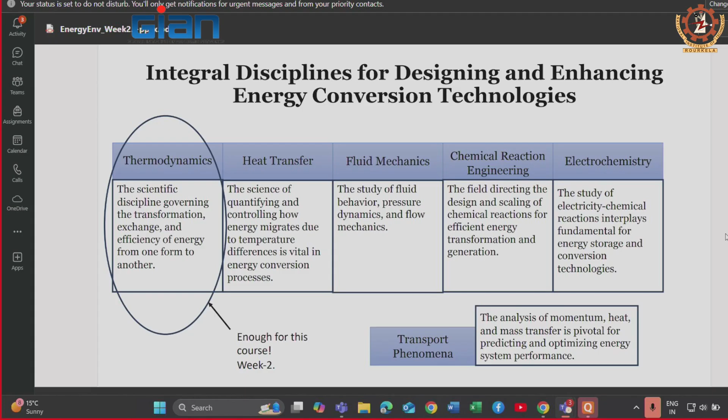And electrochemistry, the study of electricity and chemical reaction interplay, is fundamental for energy storage and conversion technologies.

The analysis of momentum, heat and mass transfer will be pivotal for predicting and optimizing energy system performance, which is called transport phenomena.

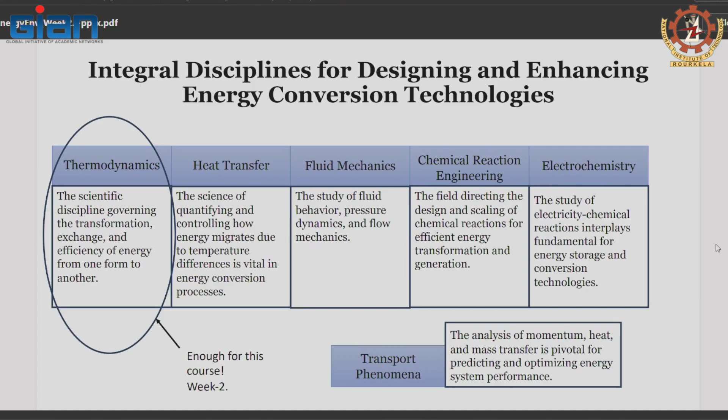But thermodynamics will play a major role in these energy conversion technologies. Here we see another importance of thermodynamics in energy and environment: system efficiency, sustainability and environmental impact.

Using thermodynamics, one can define and measure the efficiency of various systems. An example is calculating the efficiency of a heat engine, again for maintaining sustainability of the environment and understanding its impact.

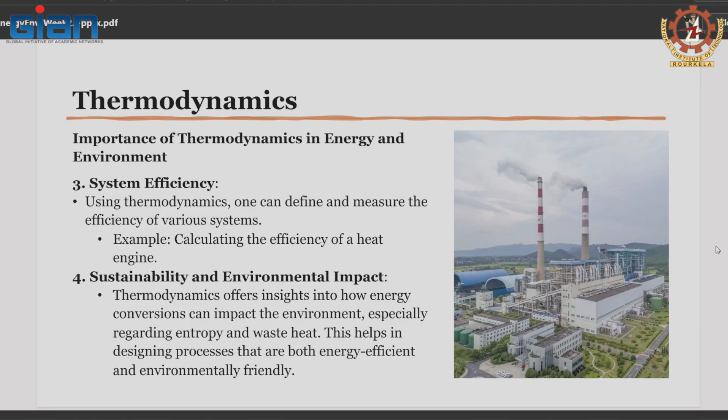Thermodynamics offers insights into how energy conversion can impact the environment, especially regarding entropy and waste heat. This helps in designing processes which are both energy efficient and environmentally friendly.

Now looking at thermodynamics in energy conversion systems: work done by the pump is supplied to the boiler where heat is supplied, and from the boiler steam is generated. Through the turbine we get work output, which is then converted to power, and the vapor can be condensed further and heat will be released.

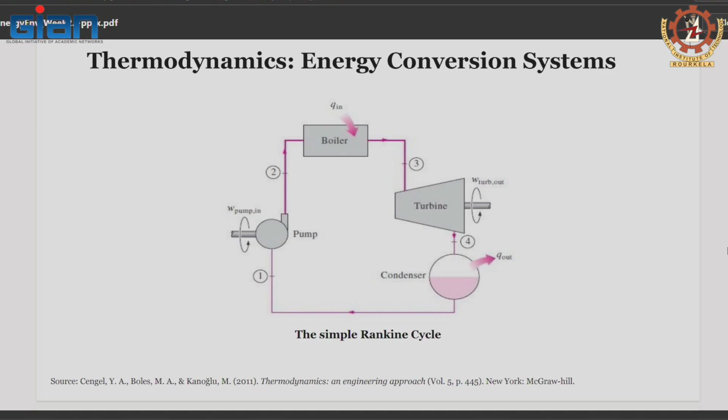So this is the simple Rankine cycle, a thermodynamics energy conversion system.

Here is a biogas fueled solid oxide fuel cell, micro CHP combined heat and power system, where energy is converted. Biogas, produced from biomass, is supplied to the reformer, and from there we finally get steam, and also the net electric power along with internal power consumption, which can be sufficient.

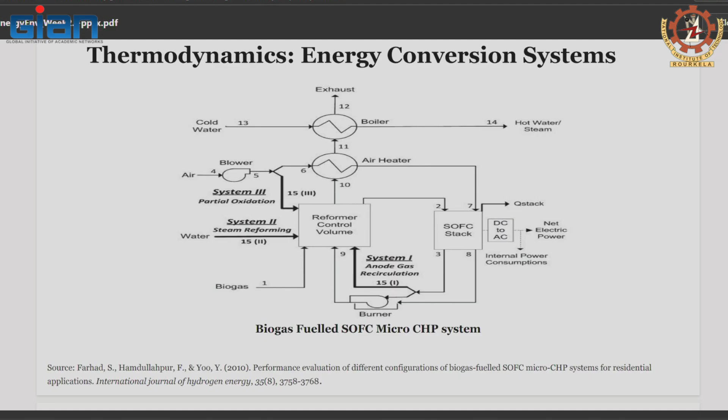From this net electric power we can get the net internal power consumption as well as some excess power. This is the thermodynamics also shown from the simplified process flow sheet.

It is for polygeneration systems, where we are getting carbon dioxide for storage, carbon dioxide emitted, sulfur emitted, and syngas is produced from this carbon dioxide, sulfur and water we are getting, and there also we are getting power.

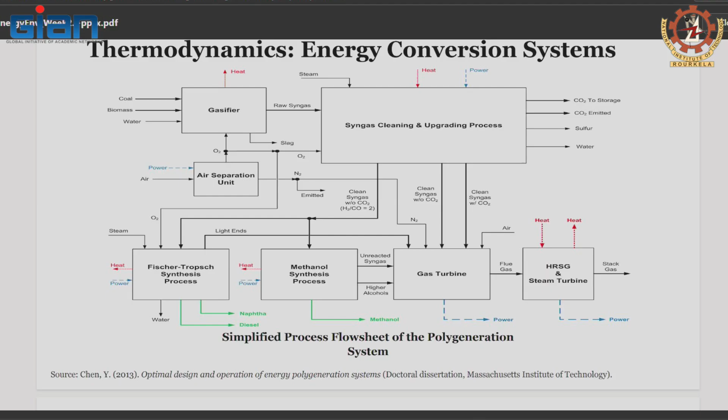The fundamental laws of thermodynamics are applied, starting with the first law of thermodynamics, where the conservation of energy principle exists, one of the most fundamental laws of nature. Energy can change forms during interaction, but total energy remains constant—it cannot be created or destroyed.

So the first law of thermodynamics again expresses the conservation of energy principle, asserting that energy is a thermodynamic property. Then there is conservation law for mass, that is, mass cannot be created or destroyed.

In a closed system, there is no mass transfer and mass remains constant. In open systems, mass can enter or leave.

Energy forms—kinetic, potential, or internal energy—are different types of energy, where the first law describes conversion between these forms, and energy transported as heat and work.

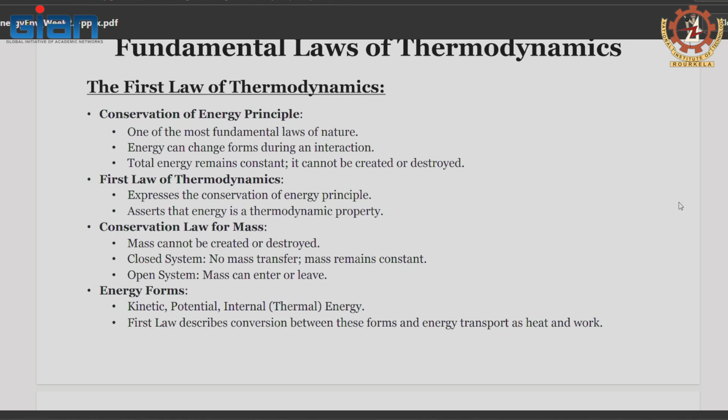So the second law of thermodynamics is also applicable here. In thermodynamic processes, processes have inherent restrictions—for example, heat flows from hot to cold, not the vice versa.

The second law of thermodynamics introduces entropy, which can be created but not destroyed, and describes the change of energy entropy due to transport and creation.

It also deals with entropy creation, which is irreversible, leading to work loss. Implications of the second law: efficiency of heat engines is restricted to values below 100%, where heat cannot be fully converted into work, and also the quality and quantity of energy is determined, since energy has both quality and quantity.

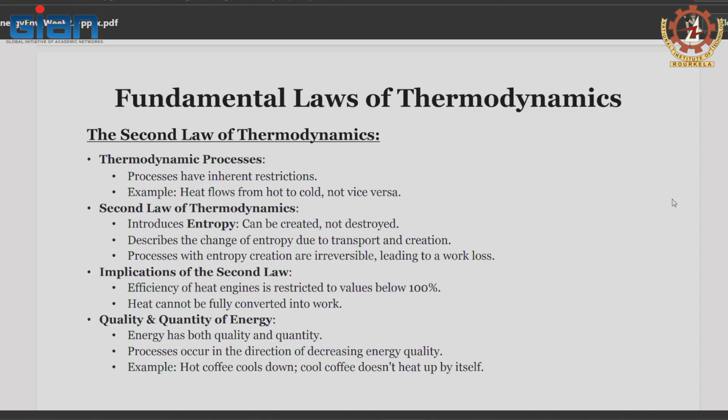Processes occur in the direction of decreasing energy quality. For example, hot coffee cools down, but cool coffee does not heat up by itself.

Modeling and analysis of thermodynamic systems involves problem statements, then step 2 is the schematic, and step 3 is the assumptions and approximations for the modeling. Then come the governing equations, the properties, solution procedure, reasoning, verification, and discussions.

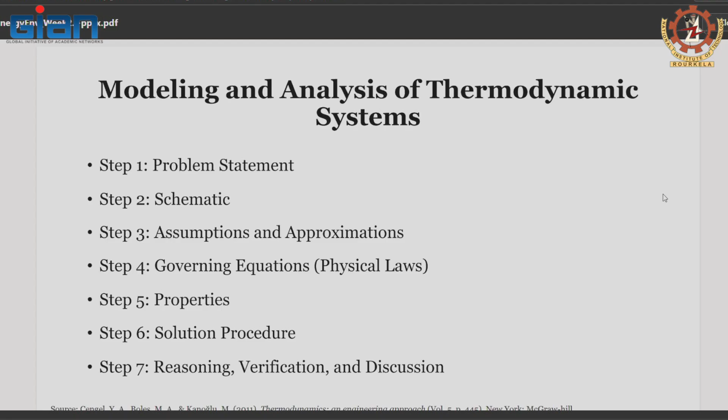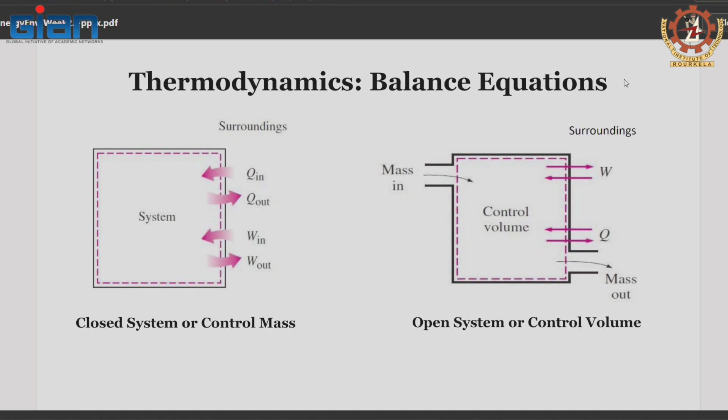This occurs in closed systems or control mass. In open systems or control volume, mass enters the control volume, work is transferred across the boundary both from surrounding to system and system to surrounding. Similarly, energy flows across the boundary in both directions, and some mass is collected out from the system - this is the open system or control volume.

For thermodynamic balance equations in closed systems, mass input equals mass output, meaning total mass remains constant.

For energy balance, energy in minus energy out equals the total energy. So the net change, net energy transferred by heat and work, equals the change in total energy, or net energy internals - that is kinetic energy, internal energy, and potential energy.

For exergy balance, net exergy transferred by heat and work - that is x in minus x out minus x destroyed, how much energy or heat and work gets destroyed - equals delta x of the system, that is the change in exergy.

For thermodynamic balance equations in open systems, mass in minus mass out is the net mass in the system, and energy in minus energy out is the net energy in the system. Energy transfers occur by heat, work and mass, and the net energy is the change in internal, kinetic, and potential energy - all forms of energy existing in the system.

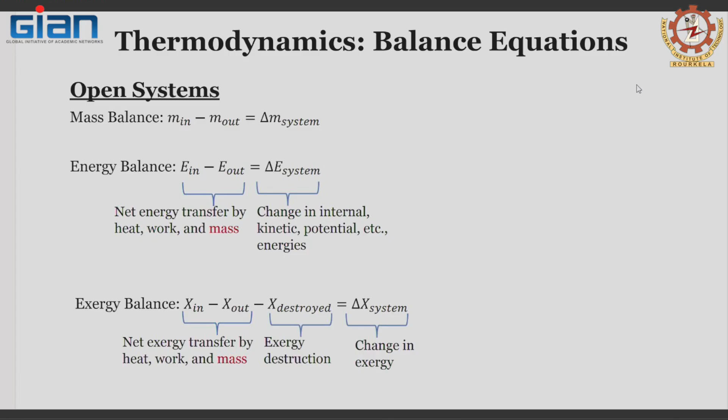See example 1 on the balance equations for this thermodynamics concept. A textile plant requires 4 kg per second of saturated steam at 2 megapascal, extracted from the turbine of a cogeneration plant. Steam enters the turbine at 8 megapascal and 500 degrees centigrade at a rate of 11 kg per second and leaves at 20 kilopascal.

The extracted steam leaves the process heater as a saturated liquid and mixes with the feed water at constant pressure. The mixture is pumped to the boiler pressure, assuming an isentropic efficiency of 88% for both the turbine and the pumps. Determine the rate of process heat supply and the net power output.

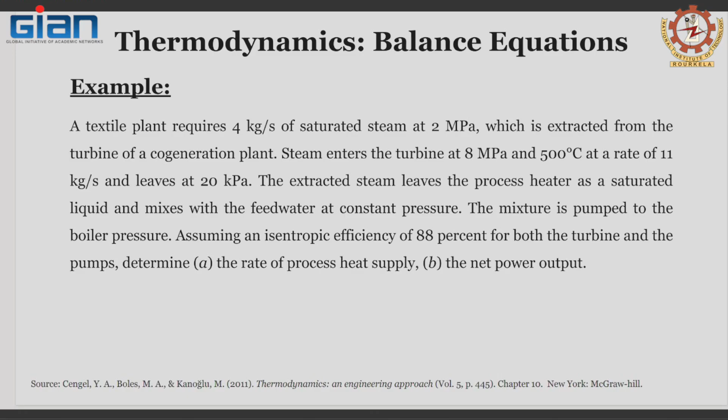The solution: the problem states a combined heat and power facility designed to produce electricity and process heat. Some steam is taken from the turbine at high pressure for heating, and the facility's heat output rate, total net power generated, and plant efficiency need to be calculated.

Assumptions: steady operating conditions exist, and kinetic and potential energy changes are negligible.

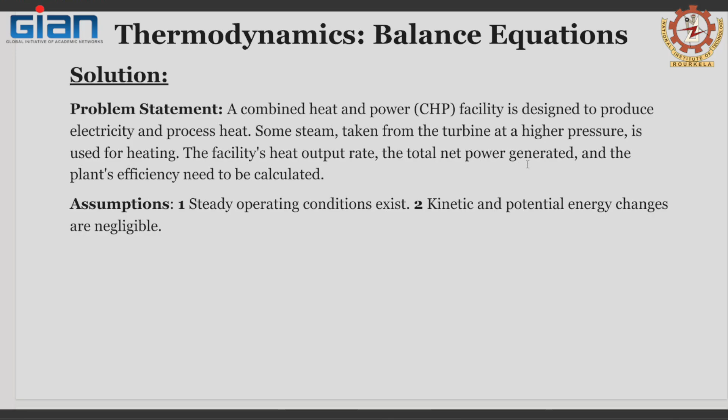So, thermodynamic balance equations solutions, that is rate of process heat supply, that is Q process equals mass into net enthalpy, that is m dot 7 into H7 minus H3, where m dot 7 is m dot 3, that is from the mass balance for the process heater. M dot shows the mass flow rate, and H7 and H3, the difference is the enthalpy values at stream 7 and stream 3, that is the thermodynamic property.

Which use steam tables to define the enthalpy values with the two independent properties, and for different substances one needs to employ various property methods to define their thermodynamic properties. Several commercial tools are also available. By choosing the appropriate property method, one can estimate thermodynamic properties such as enthalpy, entropy and specific volume.

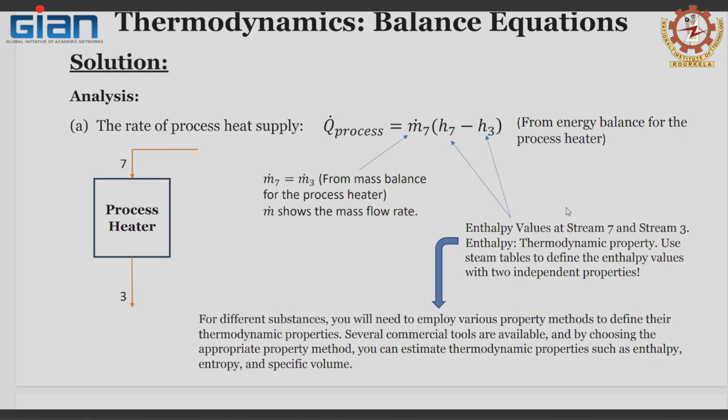Now, using turbine isentropic efficiency, one can calculate the enthalpy at stream 7. So, it is the efficiency for the turbine, H6 minus H7 divided by H6 minus H7s. So, thus at pressure 6, that is 8 megapascal, temperature for the 6th stream is 500 degree centigrade. So, from this, H6, that is enthalpy, can be obtained from the steam table.

So, H6 is 3399.5 kilojoule per kg, and S6 is 6.7266 kilojoule per kg degree Kelvin. So, for the 7th stream, pressure is 2 megapascal, and S7 equal to S6, which from that again gives enthalpy for stream 7, that is 3000.4 kilojoule per kg.

Now, again for enthalpy, H7 is H6 minus efficiency into H6 minus H7s, means side stream of the 7th stream, H7s. So, thus H7 is calculated to be 3048.3 kilojoule per kg. Now, next step, one should find H3 using steam tables.

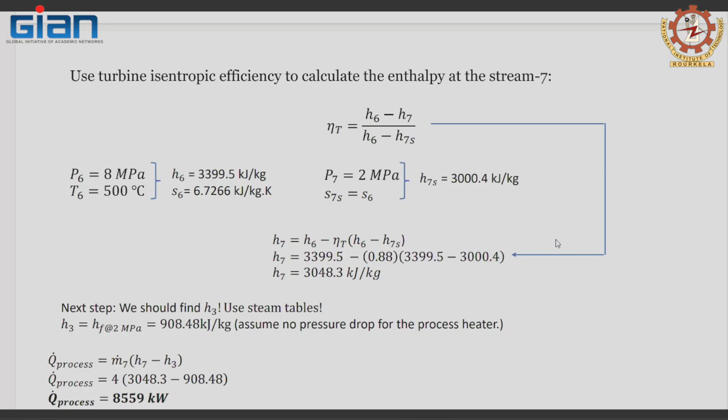Now, the power output, W dot net, which is turbine work done, that is work output from the turbine minus the work input to the pump P. So, thus work out from the turbine is m dot 7 into H6 minus H7 plus m dot 8 into H6 minus H8.

So, work done by the pump, work input to the pump, is m dot 1 into WP1 dot, means at the inlet what is the work done, work input to the pump, plus m dot 4 work done at the P2 inlet point. So, thus it is...

WP1 at the inlet is V1 into P2 minus P1 by efficiency of the pump. And WP2 at the inlet is V4 into P5 minus P4 by efficiency of the pump. So, thus H1, which is the enthalpy of the feed at 20 kilopascal, that is 251.42 kilojoule per kg, and V1, that is volume per unit mass, equal to Vf at 20 kilopascal pressure, is 0.001017 meter cube per kg.

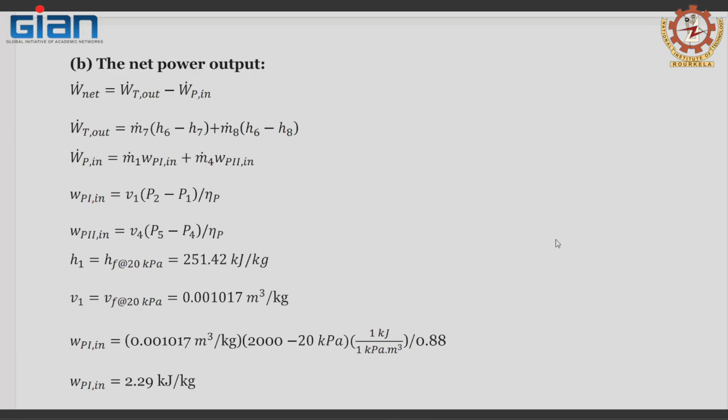So, work input at P1 is calculated to be 2.29 kilojoule per kg. H2, which is H1 plus work done at P1 point for the input side. So, H2 is found to be calculated as 253.71 kilojoule per kg.

Energy balance for the mixing chamber is calculated as M3 dot into H3 plus M2 dot into H2, which equals M4 dot into H4, that is H4 is 491.81 kilojoule per kg. Now, V for specific volume for stream 4 will be Vf at Hf equal to 491.81 kilojoule per kg, which will be 0.001058 meter cube per kg. Thus, work input at P2 for the inlet side is 7.21 kilojoule per kg.

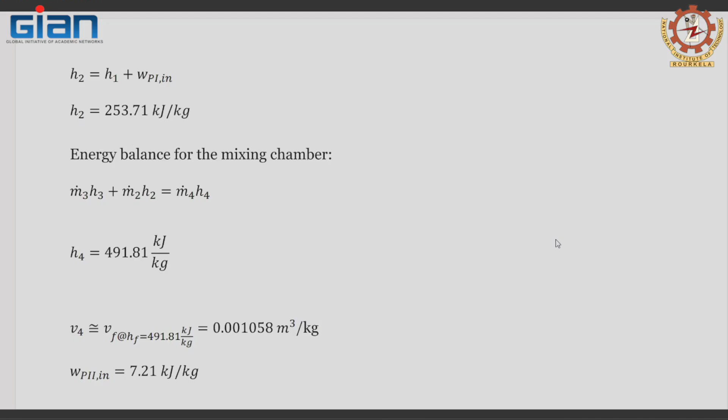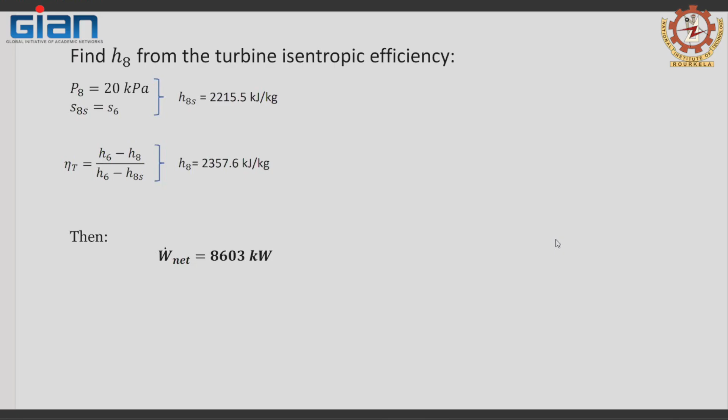So, finding H8 from the turbine isentropic efficiency, that is P8 is 20 kilopascal, S8s is S6, which gives H8s, and that is 2215.5 kilojoule per kg, and turbine efficiency is H6 minus H8 divided by H6 minus H8s, thus H8 is 2357.6 kilojoule per kg. So, thus net work done, W net dot, is 8603 kilowatt.

Now, thermodynamic analysis with the innovative technology integration is the problem definition. When it comes to creating fuels and chemicals through gasification, that is coal gasification or biomass, a major challenge is the resulting gas low hydrogen to carbon monoxide molar ratio, and this ratio often does not meet the specific requirements for Fischer-Tropsch or DME synthesis, even though it can vary based on the type of feed used.

One way to address this imbalance is using the water gas shift reactor to upgrade the gas. However, while this can be effective, it reduces carbon efficiency across the entire plant, which increases carbon dioxide emissions and raises the capital and processing expenses.

Alternative methods like steam methane reforming provide hydrogen rich syngas, but they come with their own challenges. For example, steam methane reforming is highly endothermic and can lead to carbon dioxide emissions due to the combustion of natural gas for heat.

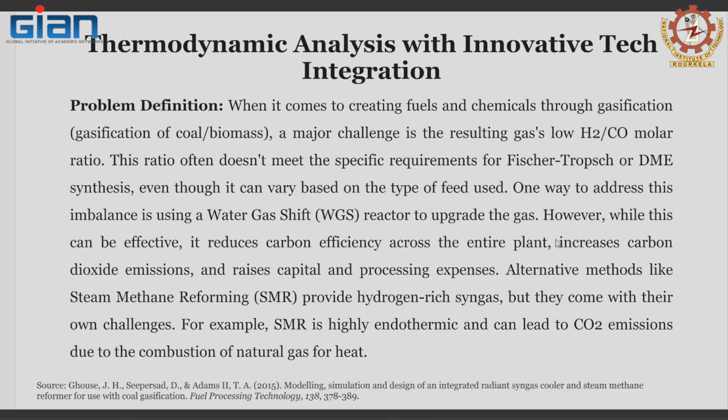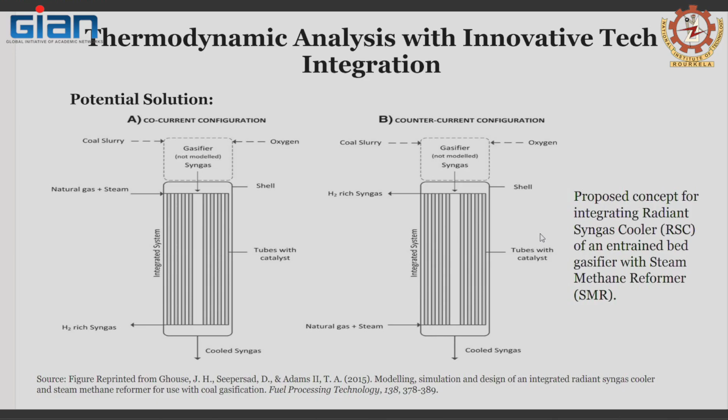So this proposed concept for integrating a radiant syngas cooler of an entrained bed gasifier with a steam methane reformer is shown here.

So the output will be natural gas and syngas. So that is a coal gasifier.

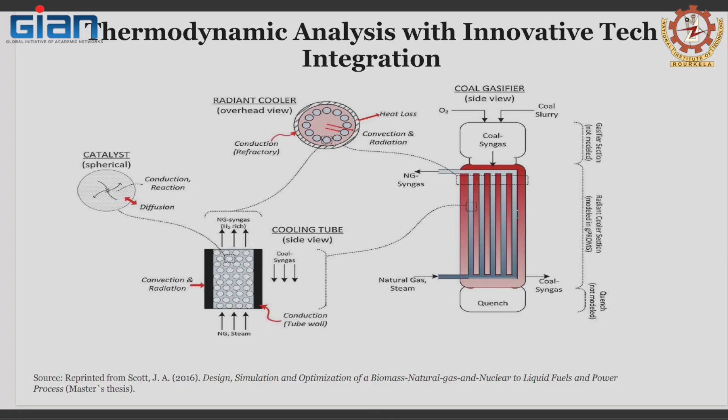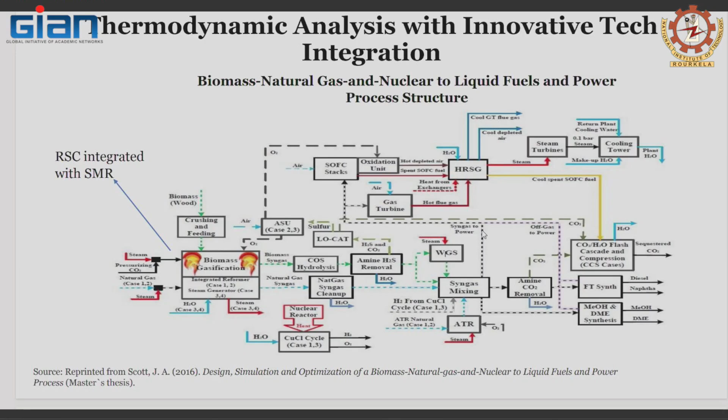Thermodynamic analysis with innovative technology integration, that is biomass, natural gas and nuclear to liquid fuels and power process structures. So here biomass, natural gas, and nuclear energy are combined, and finally we obtain the hot or syngas and the cool, pure clean syngas.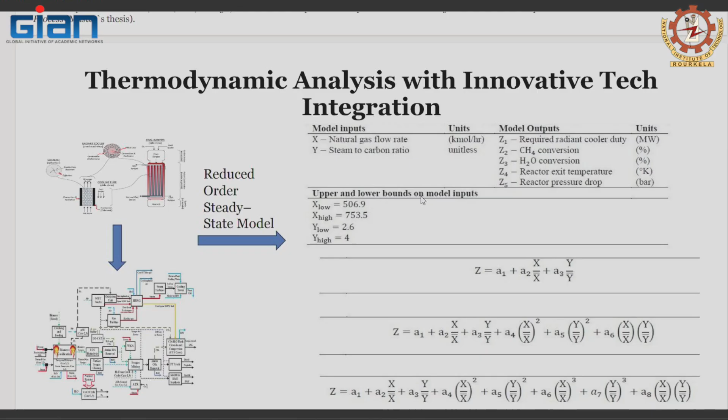Again, integrating the reduced order steady state model. So with these models, all the technologies can be integrated, and from this one can have an idea how much net energy will be generated.

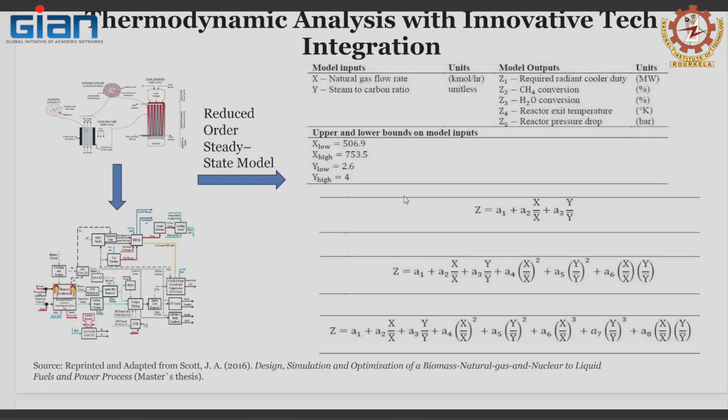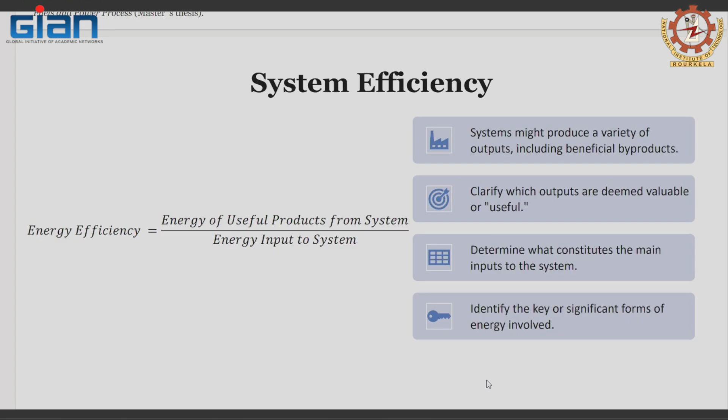Then finally, system efficiency can be calculated, that is energy efficiency, which is the energy of the useful products from the systems divided by energy input to the systems. The systems might produce a variety of outputs, including beneficial byproducts. We clarify which outputs are deemed valuable or useful, then determine what constitutes the main inputs to the systems, and identify the key or significant forms of energy involved.

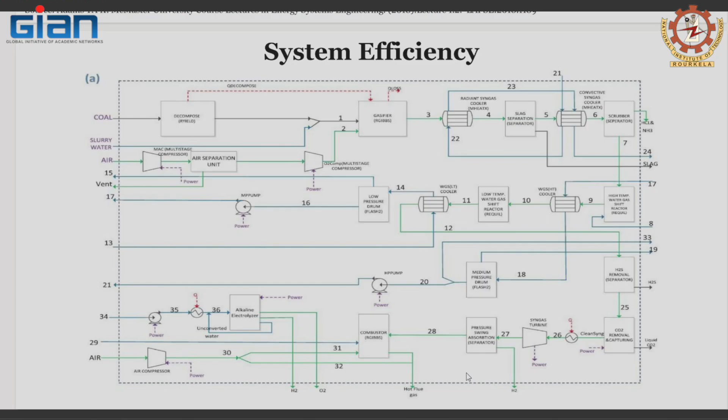This is also a flow sheet for the system efficiency. Energy efficiency of the system we can calculate using hydrogen mass flow rate into low heating value for the hydrogen, divided by coal mass flow rate into low heating value of the coal. Exergy efficiency we can calculate similarly, for the system it is hydrogen flow rate, mass flow rate into exergy of the hydrogen.

Divided by mass flow rate of the coal into exergy of the coal. So exergy of the coal means specific exergy of the coal in kilojoule per kg, exergy of the hydrogen is specific exergy of hydrogen in kilojoule per kg, lower heating value is in kilojoule per kg, and mass flow rate of coal into the gasifier is the feed for the gasifier in kg per hour.

And MH2 dot is the hydrogen production rate in kg per hour. That's all. This material was given by the foreign expert, but as he was ill, he could not deliver it. So I displayed all the PPTs, and as it is his material, I just overall read it, and wherever possible I told something. Otherwise this simulation part and the complicated flow sheets, as I am not aware of this, I could not explain.

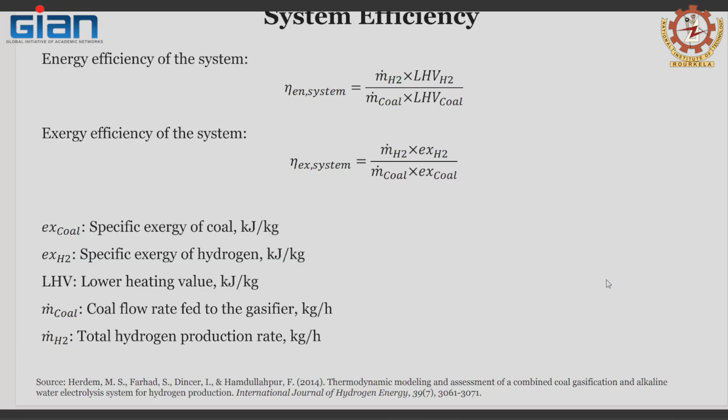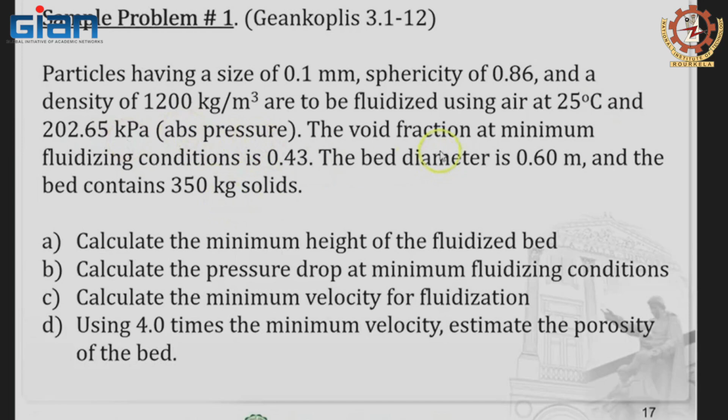Thank you. Problem 1: particles having a size of 0.1 millimeter, sphericity of 0.86, and density of 1200 kg per meter cube are to be fluidized using air at 25 degree centigrade and 202.65 kilopascal absolute pressure. The void fraction at minimum fluidizing conditions is 0.43.

The bed diameter is 0.6 meter and the bed contains 350 kg of solids. Calculate the minimum height of the fluidized bed. Second, calculate the pressure drop at minimum fluidizing conditions. Third, calculate the minimum velocity for fluidization. Fourth, using 4 times the minimum velocity, estimate the porosity of the bed.

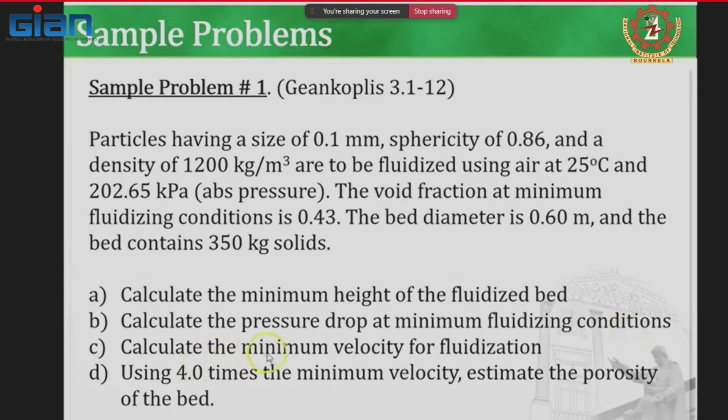So here particle diameter is 0.1 into 10 to the power minus 3 meter. Density is 1200 kg per meter cube, sphericity 0.86, voidage 0.43, diameter of the bed 0.6 meter - this data is given. Air is at 25 degree centigrade, pressure 202.65 kilopascal, density 2.372 kg per meter cube, and viscosity 1.845 into 10 to the power minus 5 Pascal second.

So we need to calculate the length or height of the fluidized bed, and the pressure drop, and then the velocity for fluidization, and voidage, and the velocity when it is 4 times the fluidization velocity.

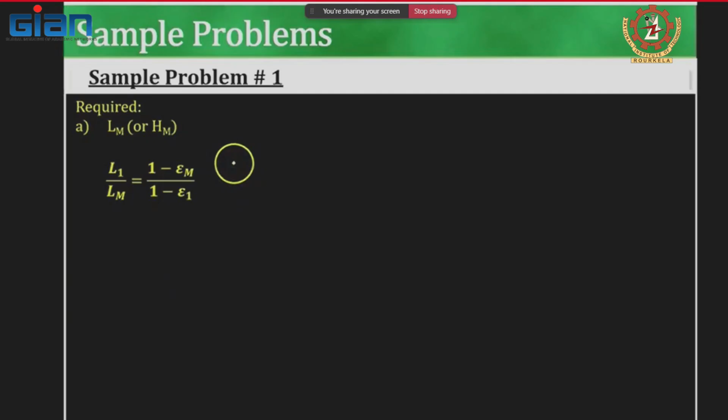Here we can see the column given, where L1 by Lm is equal to 1 minus voidage of the bed, divided by 1 minus epsilon 1. Epsilon 1 is 0, because here we have not yet started supplying the fluid. So the volume for the solid will be ms by density.

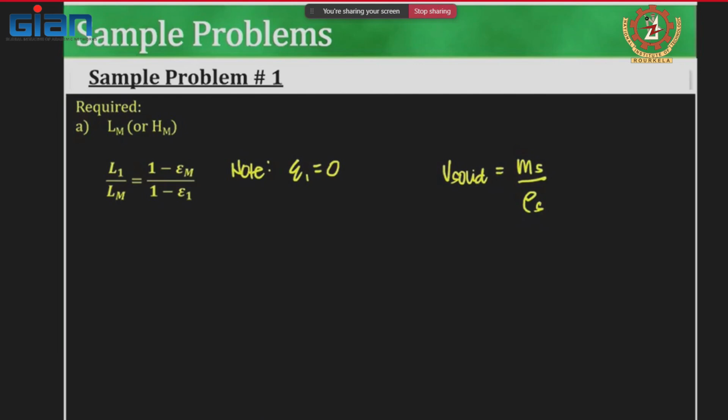Mass by density, so volume for the solid will be 350 divided by 1200 kg per meter cube, mass by density. So this is 0.2917 meter cube.

Now volume of the bed, which will be cross sectional area into length. So volume is 0.2917, which is pi by 4 d square, that is 0.6 square, into L1. From this we can get L1, which is 1.0317 meter.

Now after knowing the length, here we can calculate Lm from this expression, where voidage for the bed is given as 0.43. So 1 minus epsilon m is 1 minus 0.43, and epsilon 1 is 0, so the denominator is 1. From this, Lm comes to 1.81 meter. So the first part, calculating the minimum height of the bed, is over.

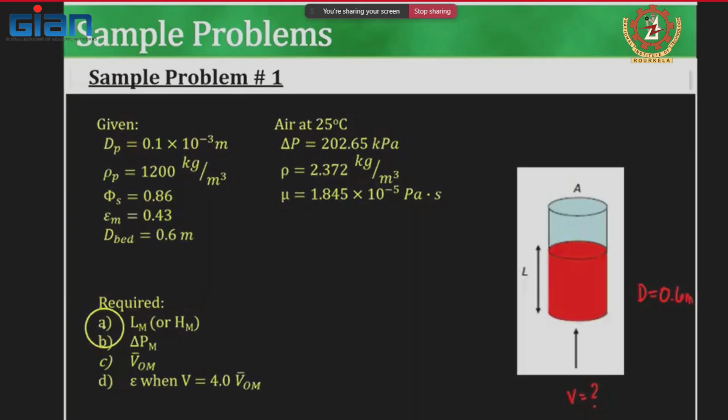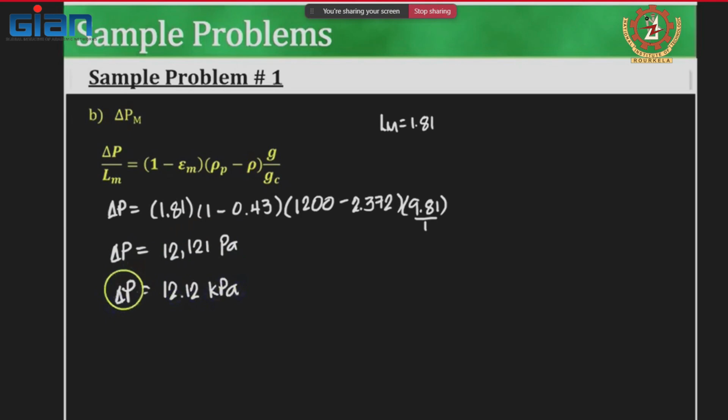Now the second part: pressure drop divided by length of the bed equals 1 minus epsilon m into density of the particle minus density of the fluid, into G by Gc. So here we can calculate delta P: 1.81 into 1 minus 0.43 into 1200 minus 2.372, into G which is 9.81, and Gc is 1. Multiplying by Lm, we finally get delta P as 12,121 Pascal or 12.12 kilopascal.

Now the third part, where the minimum fluidization velocity we can calculate using the equations given in the Kunii-Levenspiel book. So we substitute all the data we have: 150 into viscosity into velocity for minimum fluidization, which we will calculate.

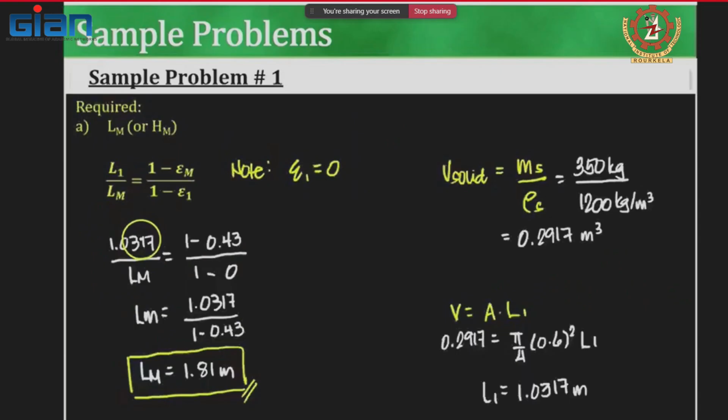Now the sphericity and the bed voidage are given. Substituting all the data, on the first term it is denominator phi s 0.86 and dp 0.1 into 10 to the power minus 3 square, dp square, and here epsilon m is 0.43. So the first term is over, only V Om, minimum fluidization velocity data, is unknown which we will calculate. The second term also has V Om, minimum fluidization velocity, as unknown data.

So substituting all other data, we can get the minimum fluidization velocity, with g 9.81, rho p 1200, and rho 2.372, that is density of the gas. Thus minimum fluidization velocity is calculated as 4.375 into 10 to the power minus 3 meter per second.

Now the second and third bit are over, so we can go to the fourth bit. When velocity is 4 times the minimum fluidization velocity, we substitute into the expression for minimum fluidization velocity from the Kunii-Levenspiel equation. In the third bit we calculated the minimum fluidization velocity as 4.375 into 10 to the power minus 3 meter per second. For this step we take this velocity as 4 times the minimum fluidization velocity, which comes to 0.0175 meter per second.

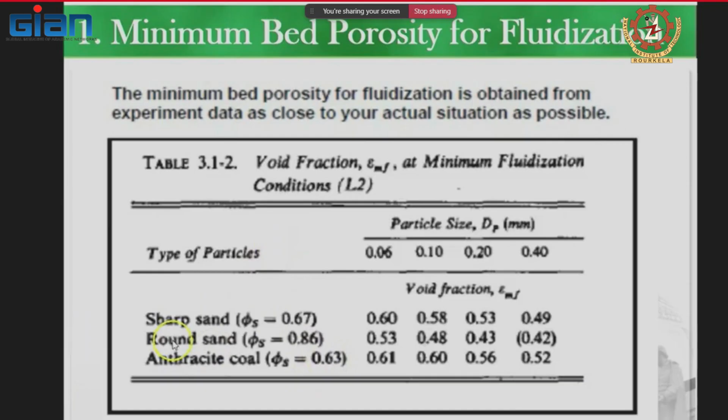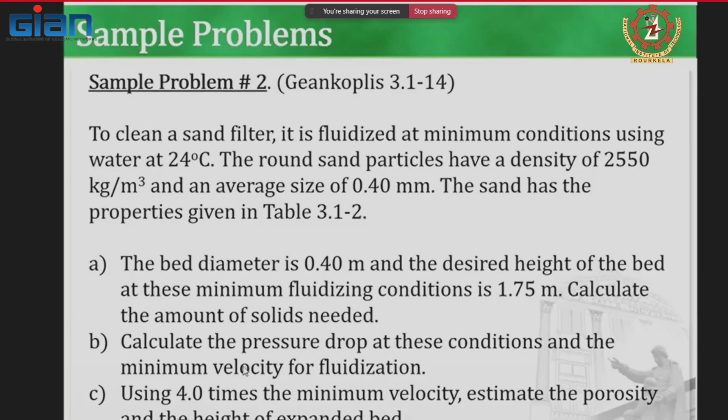So another problem, the second problem: to clean a sand filter, it is fluidized at minimum conditions using water at 24 degree centigrade. The round sand particles have a density of 2550 kg per meter cube and an average size of 0.4 millimeter. The sand has the properties given in this table. Bed diameter is 0.4 meter and the desired height of the bed at minimum fluidization condition is 1.75 meter. Calculate the amount of solid needed. Second bit: calculate the pressure drop at these conditions and the minimum fluidization velocity, and using 4 times the minimum fluidization velocity, estimate the porosity and the height of the expanded bed.

So the data is taken from the table, and round sand is there. For this, diameter is 0.4 into 10 to the power minus 3, bed void is 0.42, diameter of the bed is 0.4, length of the bed is 1.75. Water is at 24 degree centigrade, for which viscosity and density are as follows: 0.9142 into 10 to the power minus 3 kg per meter second, density 997.31 kg per meter cube. We need to calculate MS, mass of the solid, which is volume into the density of the particles into the bed, meaning 1 minus bed voidage.

So we can get the mass of the solid, because area is pi by 4 d square, the cross sectional area of the bed. So it is pi by 4 into 0.4 squared, and here length of the bed is 1.75, with 1 minus 0.42 bed voidage, and density 2550. Thus this comes to 325.25 kg of mass solid. That is the first bit over.

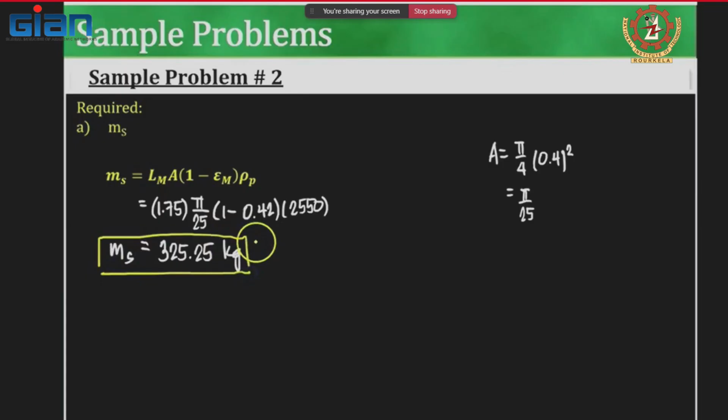Second is pressure drop and the minimum fluidization velocity. So again, delta p by Lm is 1 minus epsilon m into rho p minus rho into g by gc.

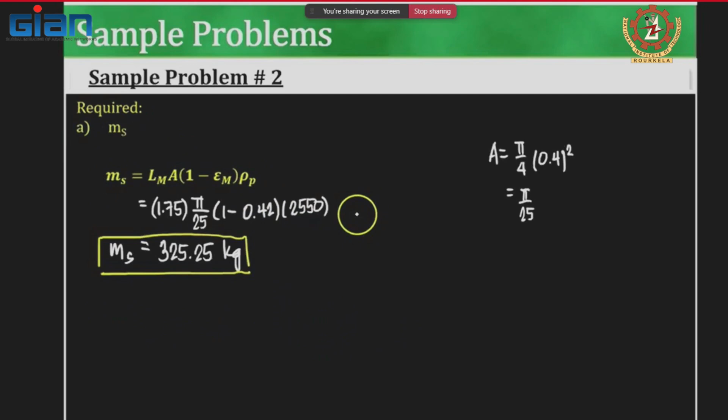So the pressure drop can be calculated by substituting bed voidage and densities, which are known. The length of the bed is also known. So substituting all the data, we can calculate the pressure drop, which comes out to be 15,460.37 Pascal, or 15.5 kilopascal.

Now the minimum fluidization velocity can be calculated using the equation given in the Kunii-Levenspiel book. Using the data, that is porosity, viscosity, and sphericity, since round spherical particles are taken, sphericity will be 1, and all other data like particle size and densities are known. So substituting all the data, we can calculate. But from the data table, although it is nearly round, the sphericity given is 0.86.

So we are taking 0.86 sphericity and calculating the velocity. On the right side, we have 9.81 into rho p, 2550 minus rho, 997.31. So the minimum fluidization velocity comes out to be 1.658 into 10 to the power minus 3 meter per second.

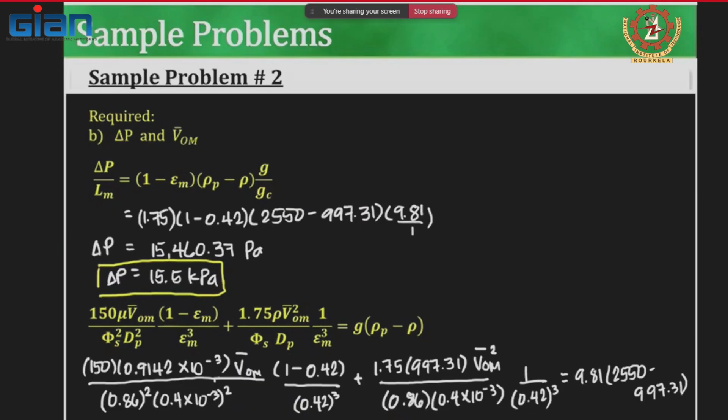Now for the third part, the porosity and length of the bed are required when the velocity is 4 times the minimum fluidization velocity. Using the same equation for minimum fluidization velocity, we substitute velocity with 4 times the minimum fluidization velocity, from which we can calculate the porosity, because with increased velocity, porosity increases and changes. Substituting V as 4 times the minimum fluidization velocity, it comes out to be 6.632 into 10 to the power minus 3 meter per second.

Now substituting all this data into the equation, we can get the porosity, which comes out to be 0.6. So we see that the porosity has changed, it has increased.

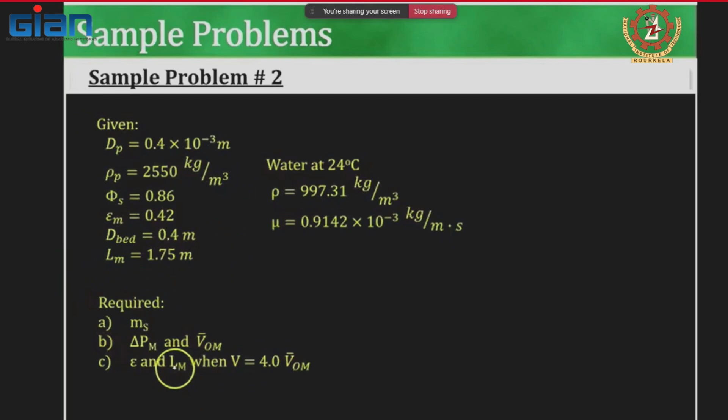Now we can calculate the length of the bed using this expression: L1 by L2 equals 1 minus epsilon 2 by 1 minus epsilon 1, since porosity will be different at different heights. If we take L1 as Lm equal to 1.75 meter, which is given, and epsilon m equal to epsilon 1 equal to 0.42, corresponding to the initial porosity of 0.42, the height of the bed was 1.75 meter. Now the porosity changes to 0.6, and correspondingly, the length of the bed can be calculated using this equation, which comes out to be 2.5375 meter. So the length of the bed corresponding to porosity of 0.6 is 2.5375 meter.

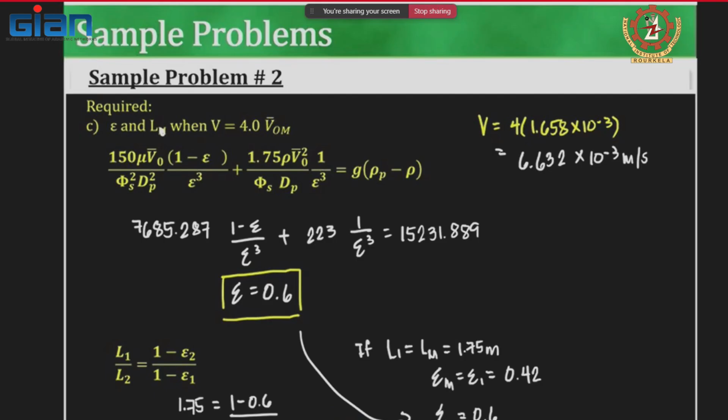Now coming to the fourth part - sorry, with this the third part is over. So now we can solve another problem.

A powder of mean size 60 micrometer and particle density 1800 kg per meter cube is fluidized by air of density 1.2 kg per meter cube and viscosity 1.84 into 10 to the power minus 5 Pascal second in a circular vessel of diameter 0.5 meter. The mass of the powder charged to the bed is 240 kg, and the volume flow rate of air to the bed is 140 meter cube per hour. It is known that the average bed voidage at incipient fluidization is 0.45, and correlations reveal that the average bubble rise velocity under the conditions is 0.8 meter per second. Estimate the minimum fluidization velocity, the bed height at incipient fluidization, the bubble fraction, the bed height, and the mean bed voidage. So now we can solve this tutorial problem.

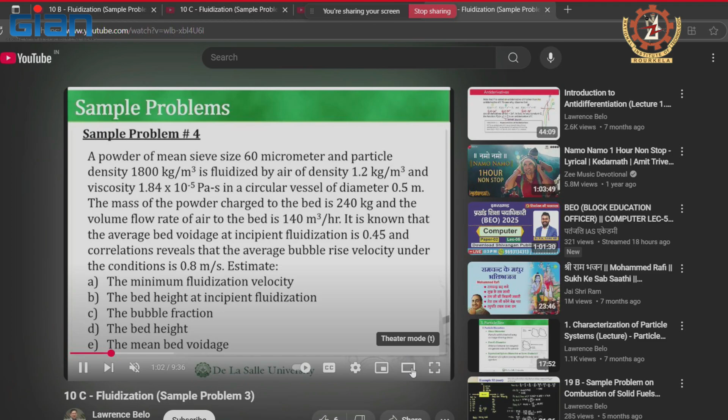Data given: particle size d is 60 into 10 to the power minus 6 meter, density of the particle 1800 kg per meter cube, density of the air 1.2 kg per meter cube, viscosity of the air 1.84 into 10 to the power minus 5 Pascal second, diameter of the column 0.5 meter, mass of the solid is 240 kg, and the volumetric flow rate is 140 meter cube per hour.

Again, voidage at incipient fluidization is 0.45, and the bubble velocity is 0.8 meter per second, and the bed voidage is given. So the volumetric flow rate is velocity into cross sectional area.

So the average velocity, which is volumetric flow rate by area, we can get as 140 meter cube per hour, and area. So if you convert this, that is 140 meter cube per hour, converting hour to second, we can divide by 3600.

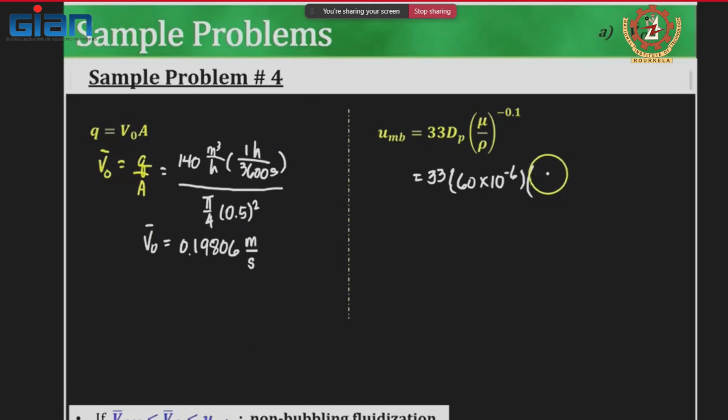So, it will be meter cube per second, and here calculating V0 comes to 0.19806 meter per second. Minimum bubbling velocity we can calculate, which is 33 dp mu by rho raised to the power minus 0.1. So thus here we can get minimum bubbling velocity.

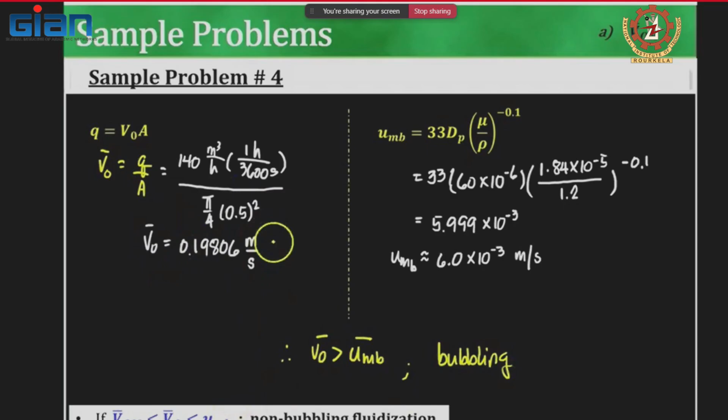Now, we can get V0 is, as you found that V0, fluidization velocity, is greater than bubbling velocity. We can say that it is the bubbling bed, meaning more bubbles will be forming.

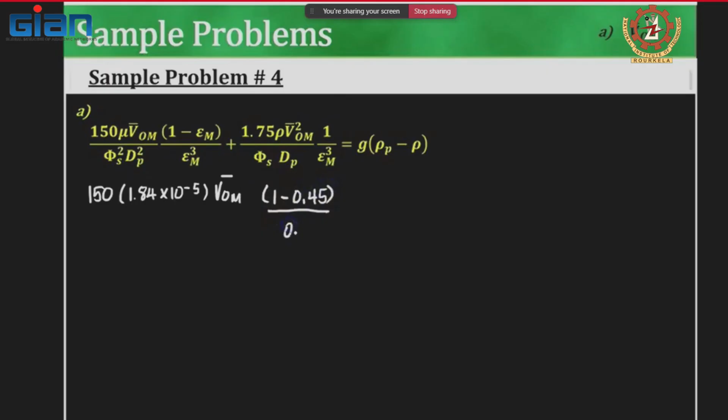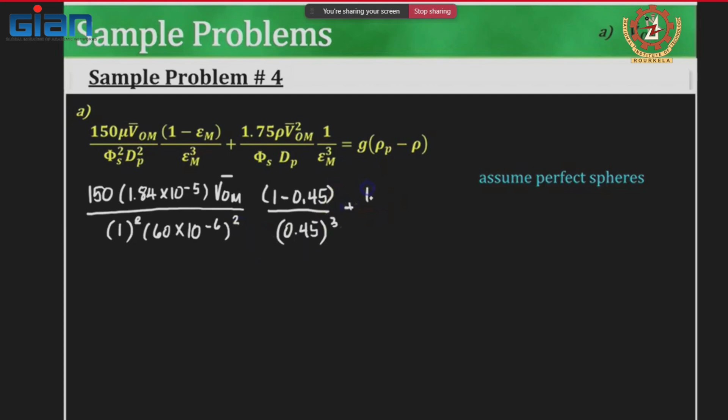And thus here we can calculate the minimum fluidization velocity corresponding to this porosity of 0.45. Now, similar to the first two examples, substituting all the data, and as sphericity is not given, assuming completely spherical particles, we can take the sphericity as 1, and thus substituting all the data, we can get the minimum fluidization velocity.

This is coming 9.81, meaning the right side is 9.81 into 1800 minus 1.2. So thus minimum fluidization velocity is 3.81 into 10 to the power minus 3 meter per second.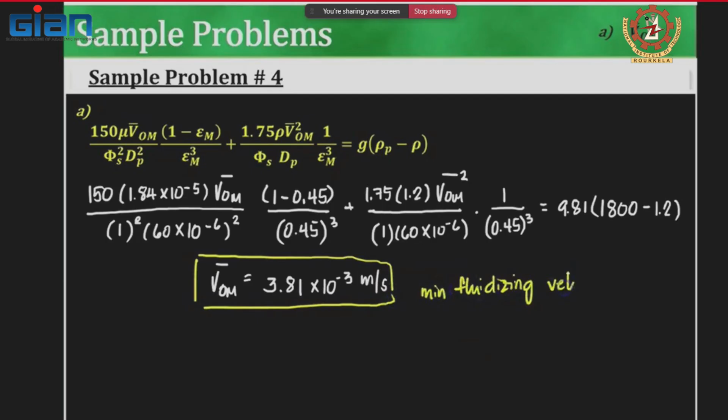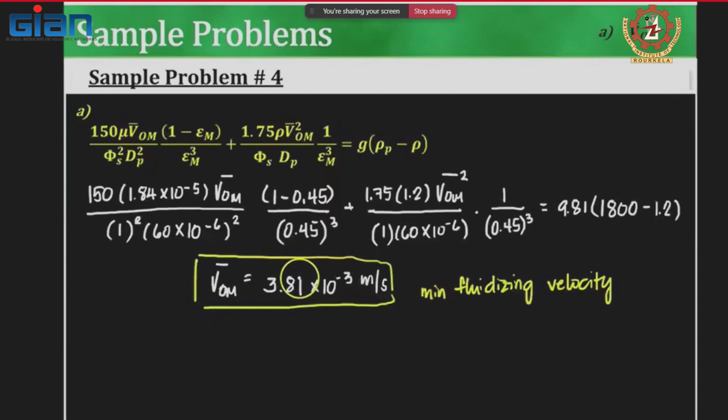Now, the second bit, here we can calculate the length of the bed. The mass flow rate already known, 140 it is given, and 240 it is given. Now L1 into, substituting, and A as cross sectional area. So here we can get...

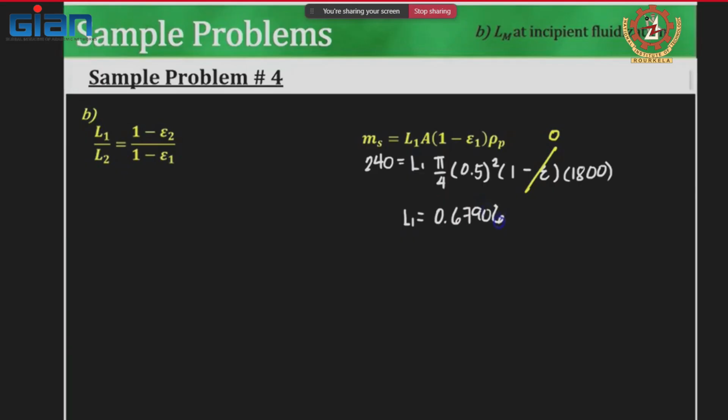So now that we can take as the length L1, length of the bed. During fluidization we can take length of the bed as L2, where the porosity is 0.45. So corresponding to 0.45 we can get the length of the bed as 1.2347.

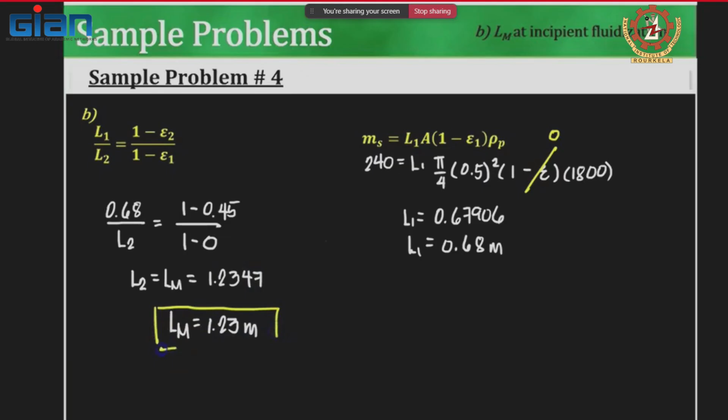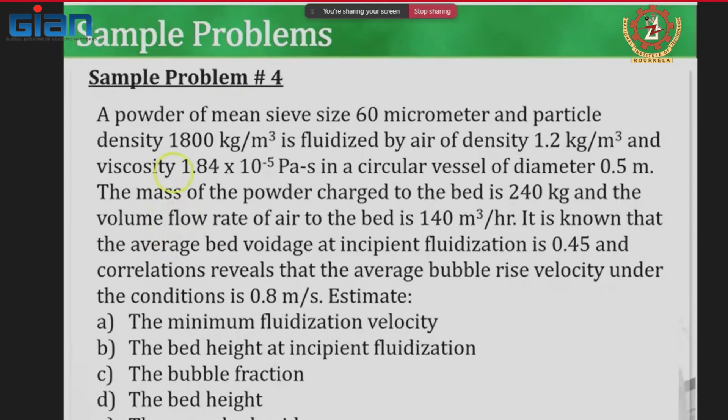Now, third bit we can calculate the velocity. Third bit is the bubble height, bubble fraction. So here we know that the velocity, which is 0.19806, and the fraction of the bubble into bubble velocity.

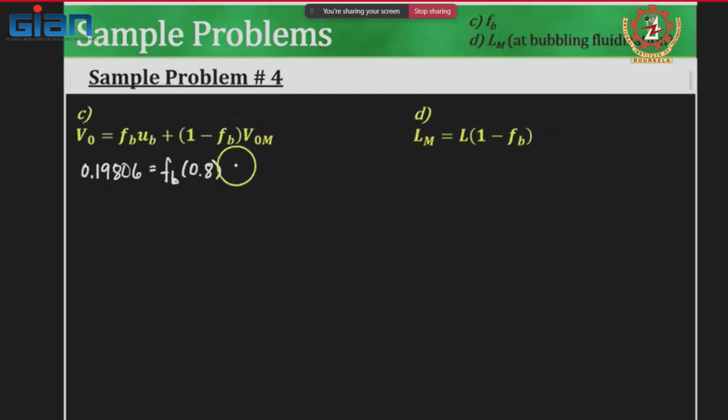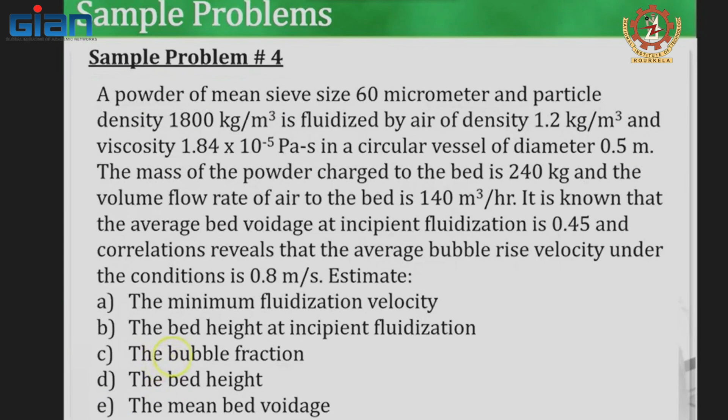Given bubble velocity is 0.8, and here 1 minus FB, that is fraction of the bubble, which is unknown, and minimum fluidization velocity. So substituting the bubble velocity and this fraction of the bubble in the bed comes to 0.244.

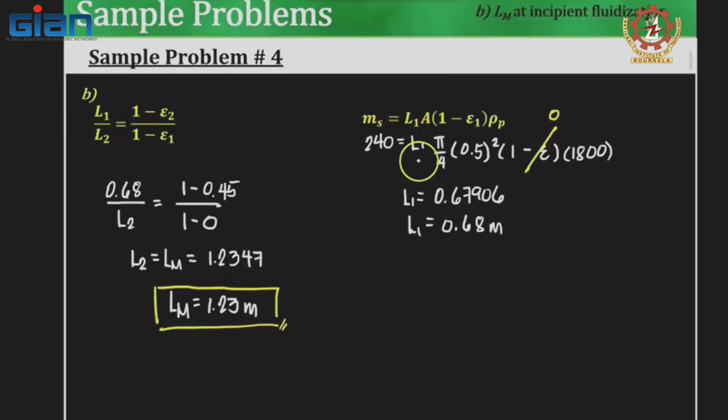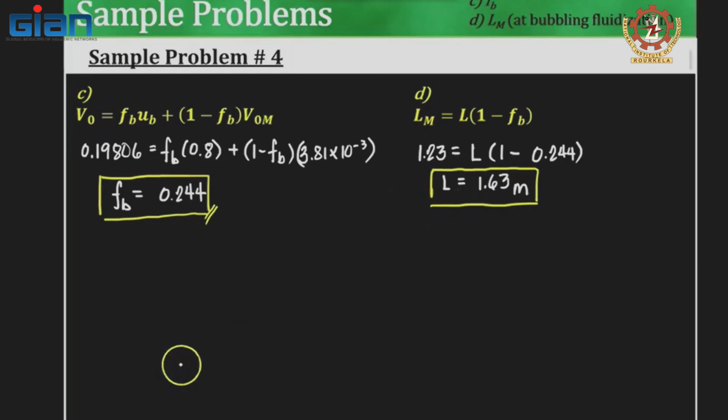Now, length of the bed corresponding to these bubbling conditions, Lm is the bed height. So here Lm is 1.23, which is L into 1 minus 0.244. So thus length of the bed we can calculate corresponding to this bubbling fluidization is 1.63 meter, because the corresponding fraction of some bubble is also occupying space in the bed. So subtracting that, we can get the bed height.

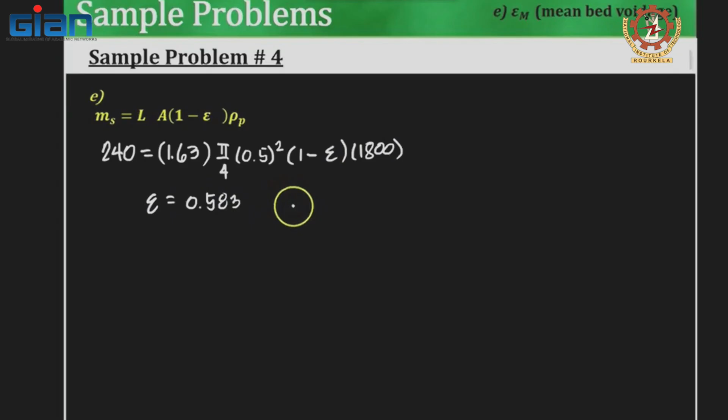Now, here the mean bed voidage will be calculated as mass of the solid is length into area of the bed into 1 minus porosity, into density of the particles. So substituting this we can get the porosity, that is volume, length into area, volume of the bed is given, and particle density is known. So mass rate is also known. So voidage is 0.583 coming, or the porosity is 0.583.

So this is a few examples towards the tutorial classes on fluidization technology fundamentals, where we calculated the minimum fluidization velocity, and if you substitute the fluidization velocity 4 times or n times the minimum fluidization velocity, how the porosity changes, how the bed height changes - those things we calculated. Also what is the bubbling velocity, and if the type of fluidization changes from incipient fluidization to bubbling fluidization, how the porosity also changes, height changes - those things we solved and calculated.

So I hope this might have given some information or knowledge on how to design the fluidized bed equipment for reaction, gasification, combustion or any purpose, because these are the fundamental things we should know - that is minimum fluidization velocity to maintain fluidization, and the bed porosity, and also the bed height. Accordingly, height and diameter of the fluidization unit can be decided, and accordingly it can be fabricated.